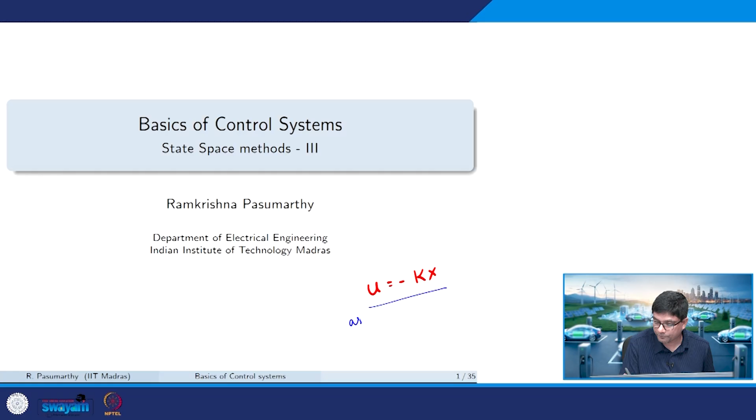We'll continue our discussion on state space methods. Where we had left off was that we could check the conditions for controllability of a system, and once the system is controllable, we defined certain objectives achievable via pole placement. One requirement there was the control law u equals negative kx, which assumes that x is continuously measured.

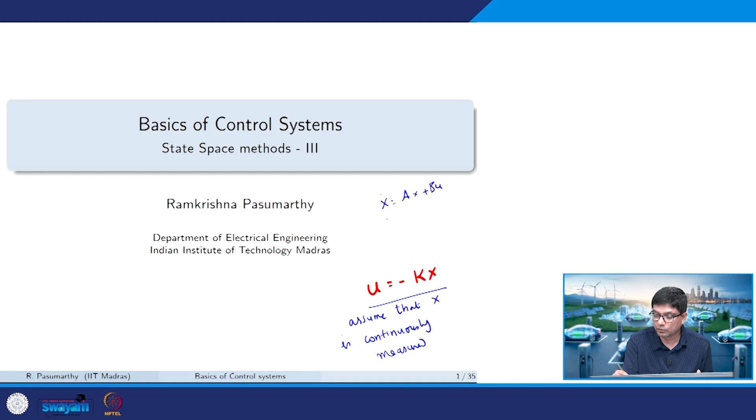Here x are the states. If I look at a DC motor, I assume I'm measuring the position, the angular velocity, and the current. In some cases it may not be possible to measure all the values, so x is not readily available. What happens if my states are 3, but I can only measure 1 at the output? So I'm looking at systems of the form x dot equals ax plus bu, and y equals cx.

In the pole placement approach to control system design, we assume all state variables are available for feedback. In practical systems, you'll only have a few outputs which are measurable. Speed in a DC motor I may be able to measure, but not positions or currents, and some may be physically unmeasurable. So we ask: is it possible to estimate the unmeasured state using the measured output data? This brings in the notion of the observer, which reconstructs unmeasurable states so I can apply state feedback control.

We'll also conclude our series of lectures on control systems by looking at what happens if there is measurement noise, and how we design things like the Kalman filter.

This brings us to the notion of observability, which we'll quickly run through. Mathematically it's the dual of controllability, and answers the question of what if all the states are not measurable. Observability deals with the possibility of estimating or observing the state of the system just from knowledge of its outputs - I don't even necessarily need the inputs.

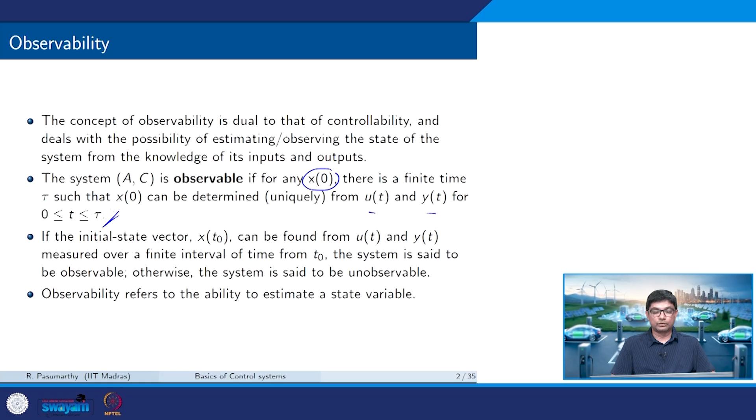The system is observable if for any initial condition x naught, there exists a tau such that x naught can be uniquely determined from u(t) and y(t), largely outputs, observed over a given period of time. So if the initial state vector can be found from u(t) and y(t) measured over a finite interval of time, the system is said to be observable; otherwise it's unobservable. Observability refers to the ability to estimate a state variable.

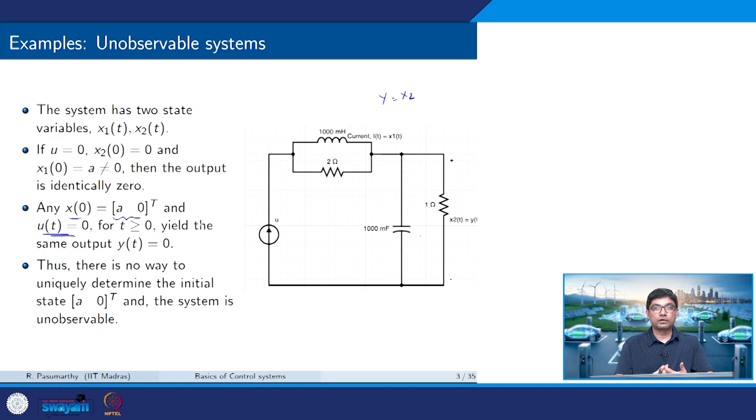Let's see this concept with an example. The circuit here has two states: the inductor current and the capacitor voltage, and let's say there is no input. If u is 0 and x2 is 0, and x1 is some non-zero value, the output is identically 0 - say I'm measuring y as x2. Now any x naught which is (a, 0), with u(t) equal to 0, will yield the same output for any value of a. So there's no way to uniquely determine the initial state a, and the system is rendered unobservable.

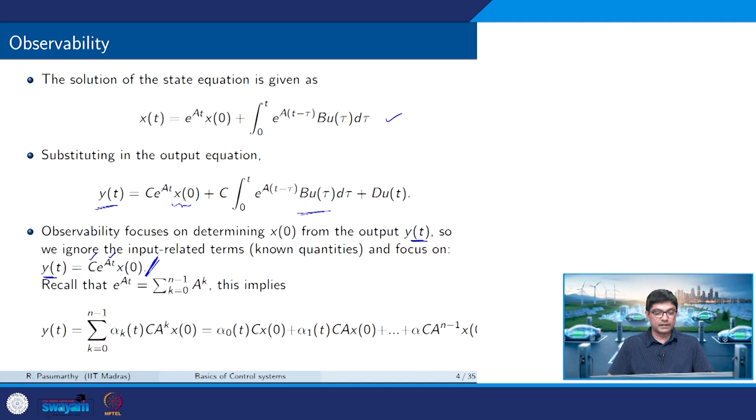So again, I have an equation in the unknown x naught. So I do a little bit of matrix algebra and ask myself a question: when does a solution x naught exist?

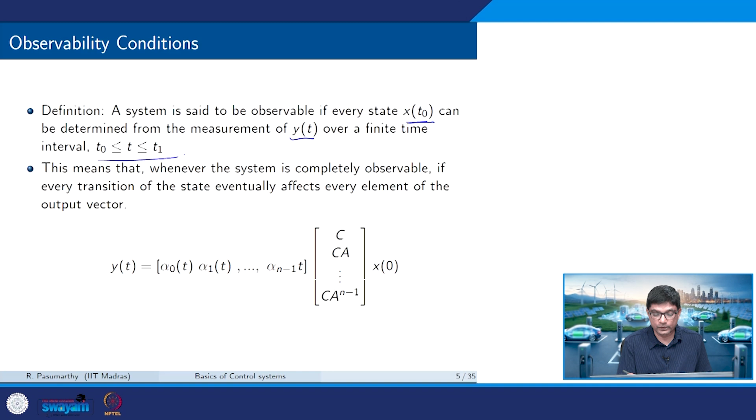A system is said to be observable if every state x at t naught can be determined by the measurement of y over t, over a finite interval from t naught to t1. This means that whenever the system is completely observable, every transition of the state affects every element of the output vector. Mathematically, this means finding x naught boils down to looking at the rank of what I call the observability matrix. We won't go too much into details, but you can write these expressions as a set of linear equations. The condition for observability is that the system is completely observable if and only if the rank of the observability matrix is n.

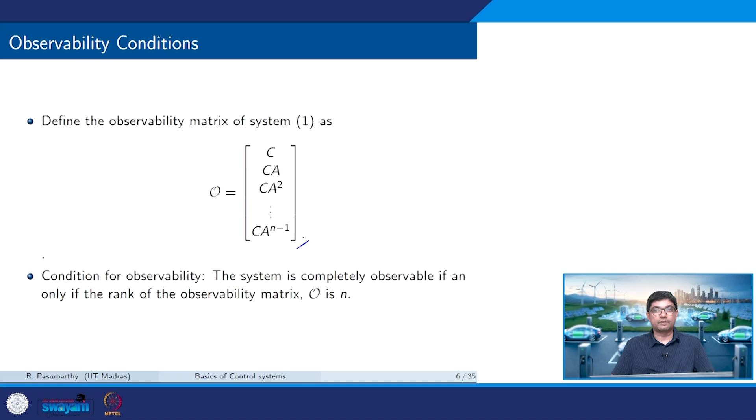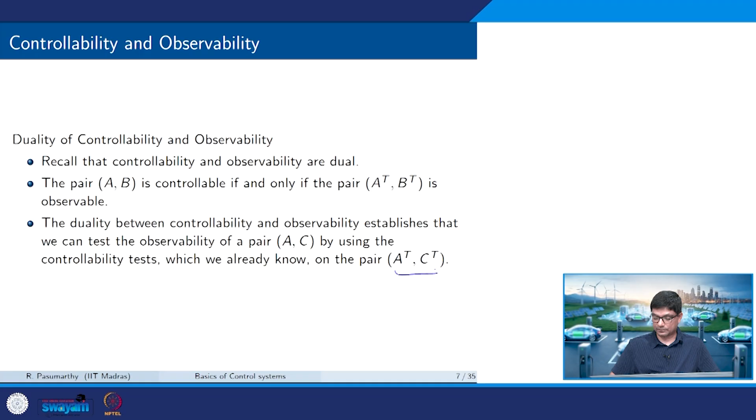There is a duality between controllability and observability: if the pair A, B is controllable, it means the pair A transpose, B transpose is observable. Similarly, observability of a pair A, C can be tested by looking at the controllability test of A transpose, C transpose. This is just a small passing remark.

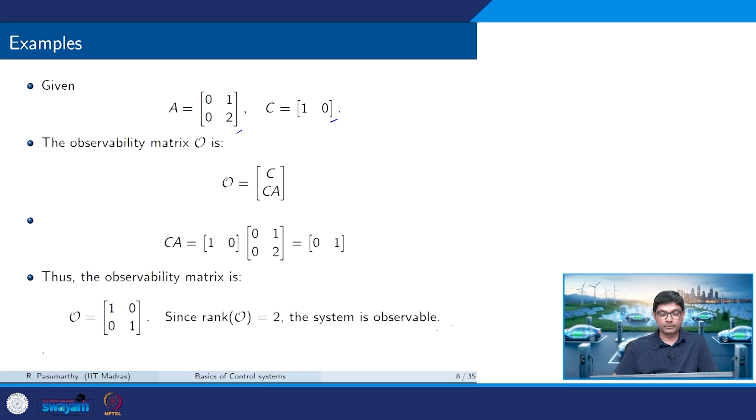So how does this look? I have a system where matrix A is of this form, matrix C is of this form. I quickly compute the rank of the matrix and see that the system is observable, because the rank of the observability matrix is 2.

Now, in the above example, if I convert the state space to a transfer function, I get a system of the form s squared minus 2s. The system has 2 states and I see there are 2 poles of the system here. There is no pole-zero cancellation, indicating the system is therefore completely controllable and also observable, so I do not lose any poles or zeros during the cancellation.

Now, instead of b being 1, 0, let's say the input enters through the x2 term, and c remains 0, 1, b is 0, 1 transpose. The transfer function of the system now will have only one pole, 1 over s minus 2. Note that there is a pole-zero cancellation at s equal to 0, indicating that the system is either unobservable or uncontrollable. The rank of the observability matrix is given by 1, and therefore the system here is unobservable.

So whenever we lose controllability or lose observability, there will be a pole-zero cancellation in the system.

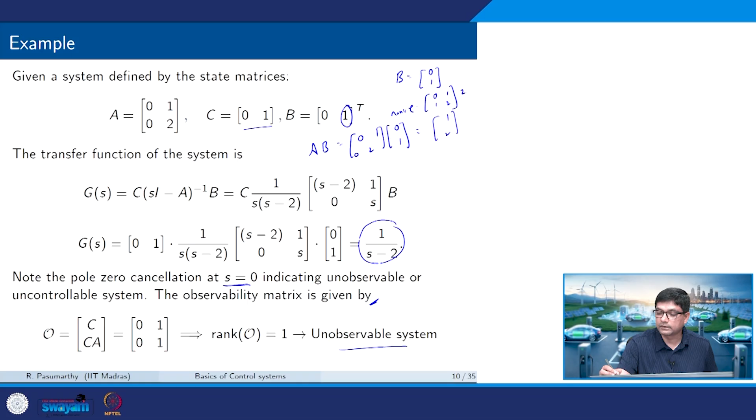So let's quickly check if the system is controllable or not. When b is 0, 1, A times b is 0, 1, 0, 2 — my b is 0, 1, this will be 1 and this will be 2. So we get 0, 1, 1, 2. Well, the system is actually controllable, but the pole-zero cancellation now affects the observability of the system, because the rank of C is 2, and therefore the system is controllable, but it is not observable.

So now, back to why we are designing this: we need to implement u equal to minus kx, and in that implementation, sometimes all the states are not available for measurement. Now, given the notion of observability, we ask: can I get the initial state based on certain measurements of the output from some initial time to some final time?

So why is the notion of observability not completely sufficient? The standard notion of observability provides only the value at a particular instant of time, say t naught. Now, when I say u equal to minus kx, I'm not just satisfied by taking x at t naught — I need continuous estimates of the state. So, just by measuring, say, the speed, can I get an estimate of theta and the current?

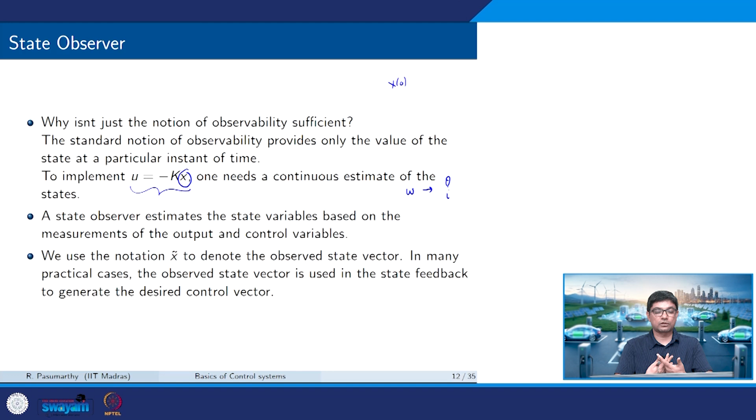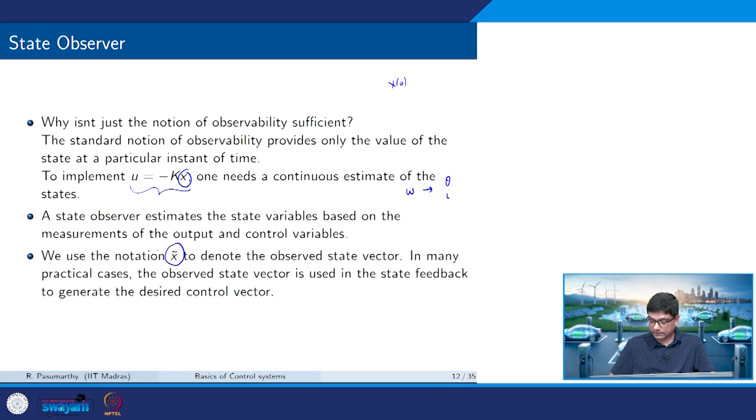This state observer estimates the state variables based on the measurements of the outputs and control variables. We will use the notation x tilde to denote the observed state vector. In many practical cases, the observed state vector is used in the state feedback to design the control vector.

So what does all this mean? This is my given system, and now I consider a copy of the original system. Here x hat is my estimated state, which I use when I can only measure one of the outputs. I can measure maybe the speed of the motor, but I am also trying to estimate the position and the current. So this is the estimated value, and this x is the original value. There will be an error in this definition.

Now taking derivatives of this, I'll skip a bit of this part. So E dot will be A x cap minus A x. It's simple to see that E dot equals A times E, if A is a stability matrix.

What I want is that E must eventually go to 0. So if A is a stability matrix, which means all the poles or eigenvalues of A are in the open left half plane, then the error converges exponentially fast to 0 for every u. I am not really worried about what the input here is.

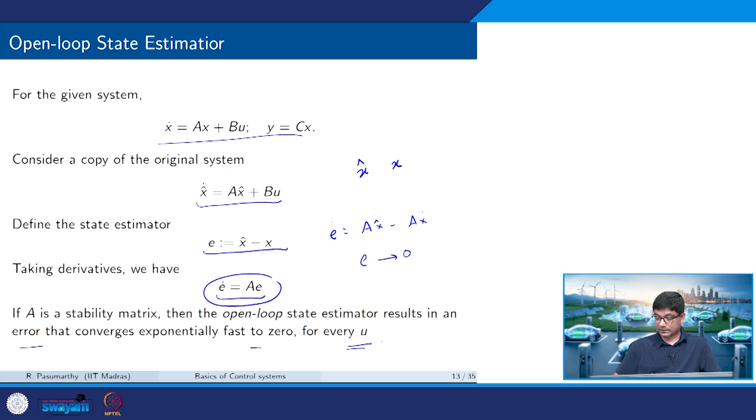Now the problem happens when A is not a stability matrix. When A is not a stability matrix, we need a closed loop estimator, which looks something like this. So I have A x hat plus BU. I introduce this error term in the output, Ke times y minus C x hat, so x hat dot now becomes A minus Ke C times x tilde, plus BU and some Ke y.

Here x hat is the estimated state, C x hat is the estimated output. The inputs to the observer are the output y and the control input u. The matrix here is now called the observer gain matrix, just like u equals minus kx was the controller gain matrix. Ke here will be my observer gain matrix.

The matrix Ke is the observer gain matrix. It is a weighting matrix to the correction term involving the difference between the measured output and the estimated output.

Now I look at what the observer error is. The observer error is again x minus x tilde. So E dot now becomes, with some simple manipulations, A minus Ke times C.

Recall the expression of state feedback. You had A minus bk times x. You could design this k to make A stable if it is not already stable, assuming the system was controllable. And if you also want to place poles at some desired locations, I could design an appropriate k.

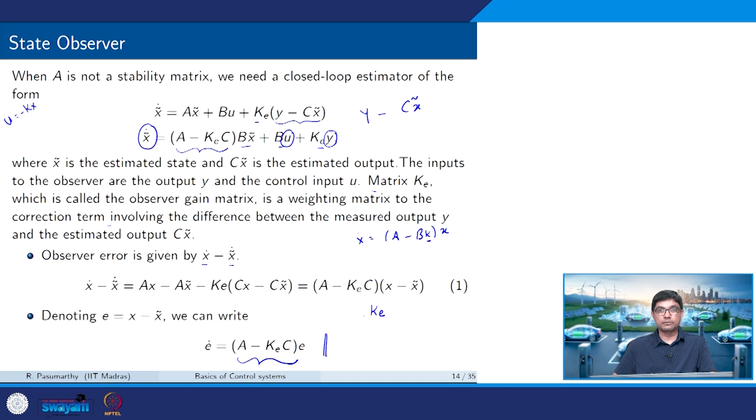So in this case, if A is not stable, I can design an appropriate Ke to make A minus Ke times C stable, and therefore my error converges to 0. If the eigenvalues of A minus Ke C are chosen so that the dynamic behavior of the error is asymptotically stable and adequately fast, then any error vector will tend to 0 with adequate speed. The observer gain Ke can be determined to yield the desired stability matrix.

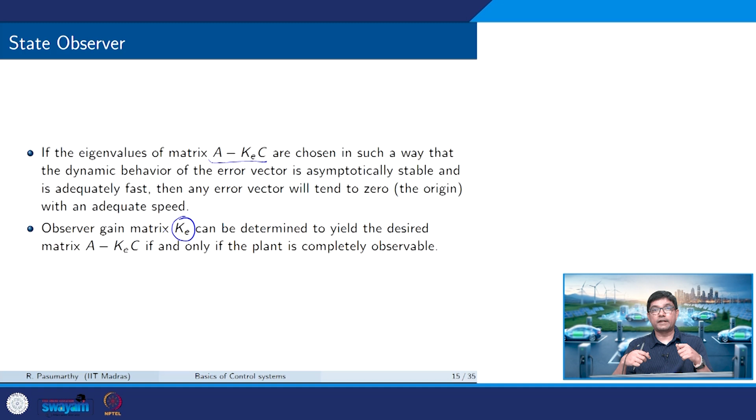Of course, when can I do this? When could I do A minus bk? I could do this if and only if the system was completely controllable.

In the same way, I can now do A minus Ke times C if and only if the system is completely observable.

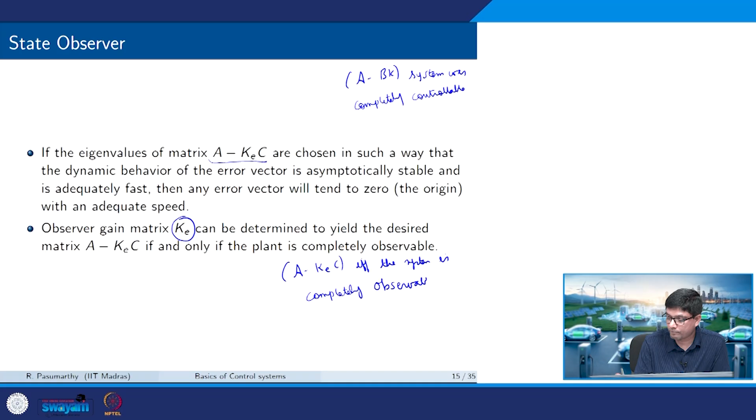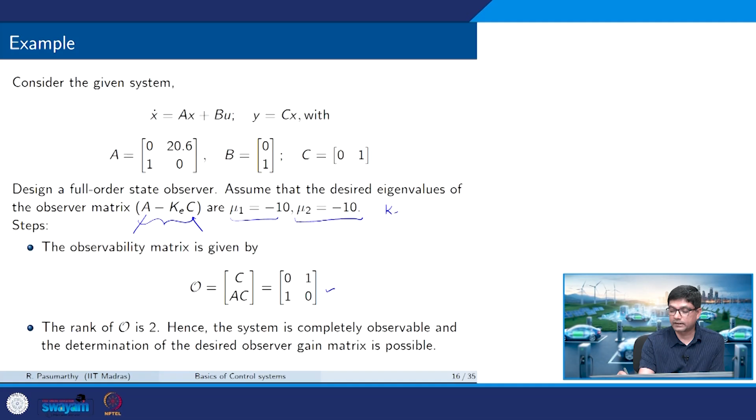Those details we can kind of skip for now, but we'll assume that the system is observable for our design purposes. So if I am given a system of this form, I can first check that the system is fully observable, and if I assume that, A minus KeC will have some eigenvalues. A is given to me, C is given to me. If I choose the observer poles to be at -10, I can design an appropriate K which will place the poles accordingly.

Okay, so it's just a standard process. In the same way as I design my A minus BK, I just look at the desired characteristic equation and map it to the characteristic equation with the unknowns KE1 and KE2. I equate the coefficients, compare the coefficients, and design an appropriate KE matrix. This is very similar to what we did earlier in pole placement.

Now what is the effect of adding an observer? In the pole placement design, I assumed that x(t) was available for feedback. However, in practice this may not be the case. I may not measure all the states, but I can measure some outputs as y equal to Cx. So we will need an observer, and we will use the observed state for the feedback.

So instead of u equal to minus Kx, now I am using u equal to minus K x-tilde. These are the observed states, and eventually the observed states will match the original states based on the observer design.

So the design process becomes a two-stage process. First, I determine the state feedback matrix gain K, assuming that the states are available for measurement. I complete my pole placement design, and then I ask myself, is X measurable all the time? If X is not available for measurement, I check for observability and design an observer.

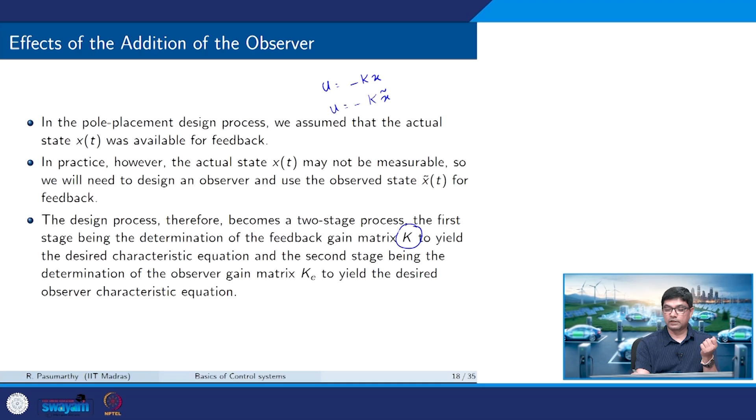So in the two-stage process, I first design the feedback gain matrix to yield the desired characteristic equation. This is based on the closed loop performance, which maps to the location of the closed loop poles. Second is the observer gain matrix, to yield the desired observer characteristic equation.

Now how does my entire process look like? I looked at control design first, then now I'm looking at observer design. So the control design, instead of u equal to minus Kx, becomes u equal to minus K x-tilde. What is my closed loop? This is Ax minus BK x-tilde.

So I can do some manipulations to write this in the form x-dot equal to (A minus BK) times x plus BK times E. How do the dynamics of E vary? E is simple - it's just capturing the error dynamics between the actual state and the estimated state.

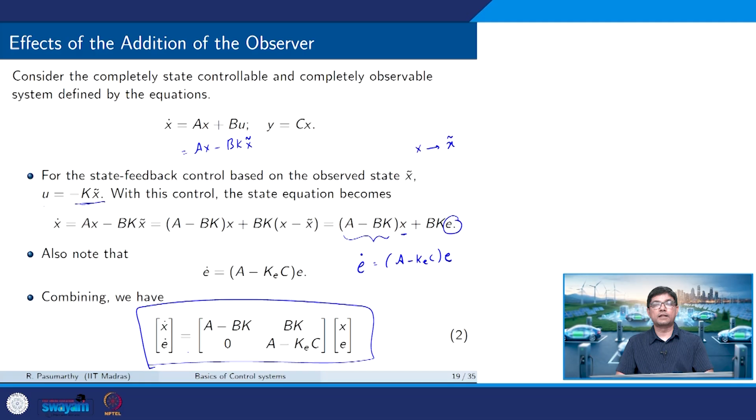So now I have a closed loop dynamics which includes the controller, the state feedback controller, and also has the observer embedded into the design.

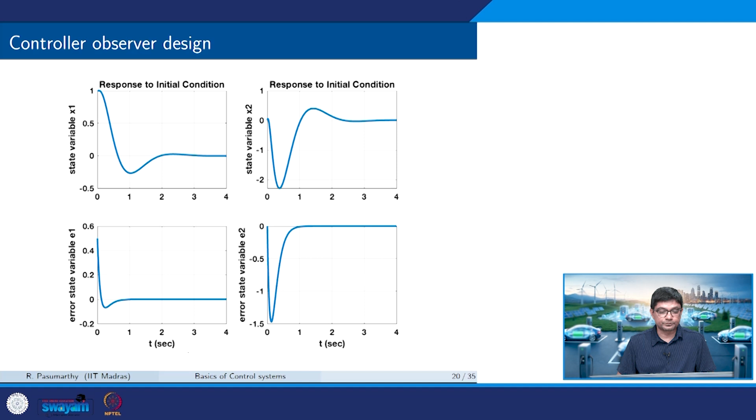So this is just a little plot of the system that we just designed. See how the errors converge to zero.

What happens when I add the observer to the system? Assume that the plant is completely observable, and we use observer-based state feedback control. Then the equations for the observer are given by something like this: x-tilde is a function of x-tilde itself, some y here, and u equal to minus K x-tilde.

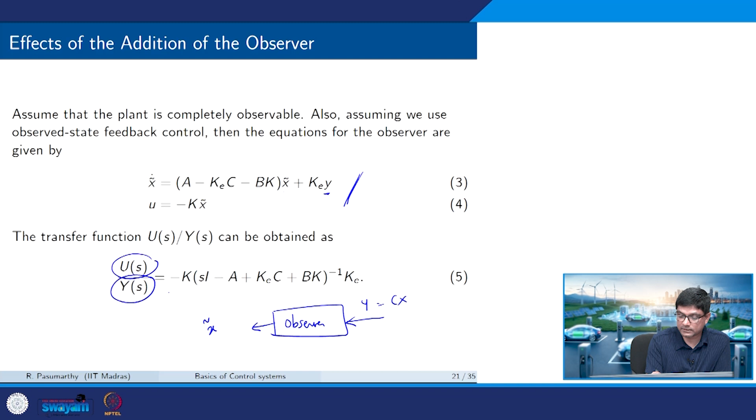So the transfer function of the observer - if I look at the observer, what does it do? The observer takes in the states y, measured as C times x, and gives as output my x-tilde. So if I look at the transfer function from y(s) to u(s), that becomes an expression like this.

So the effect of adding an observer is: I have the plant which gives me y(s), I take these measurements y(s), feed it through an observer, and generate the appropriate control input u(s) to the plant. So this transfer function now acts as a controller for the system, and hence we call this the observer-based control transfer function, or simply the observer controller transfer function. So this has both things in it - it's not just u equal to minus Kx, it has the control part, and it also has the observer part embedded into it.

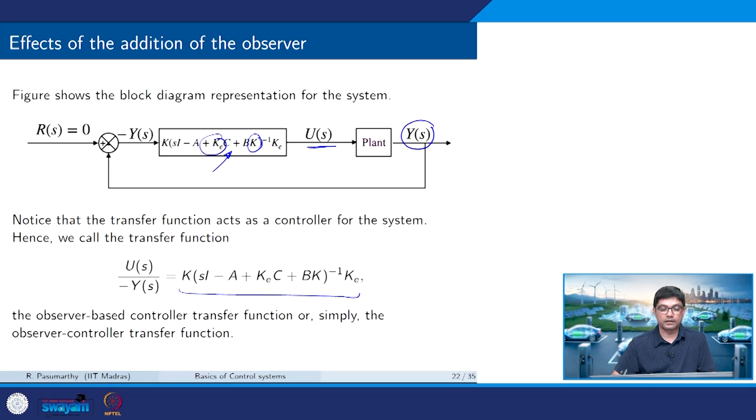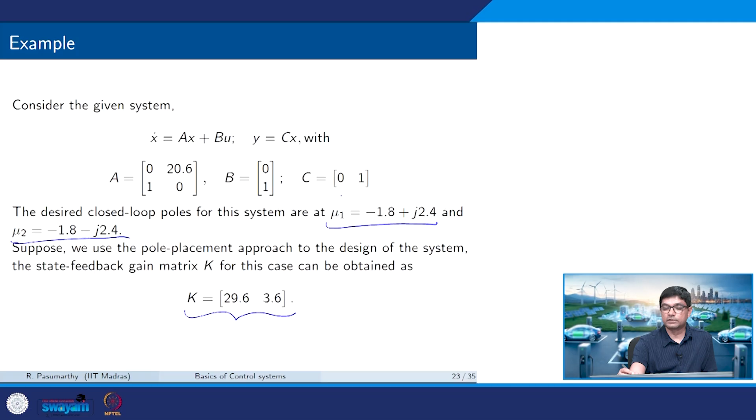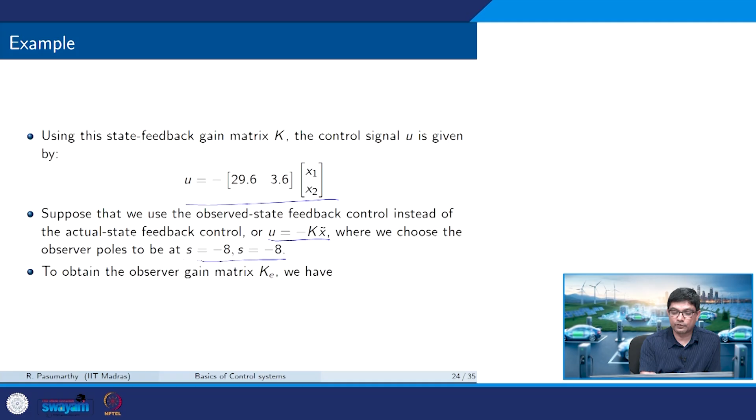Now suppose we use observer-based state feedback control instead of actual state feedback control. My output is only x2 - I don't measure both state variables x1 and x2, instead my y only gives me x2. So instead of using actual state feedback control, I use u equal to minus K x tilde, and I want to place the observer poles. I choose them a little farther away from the controller poles.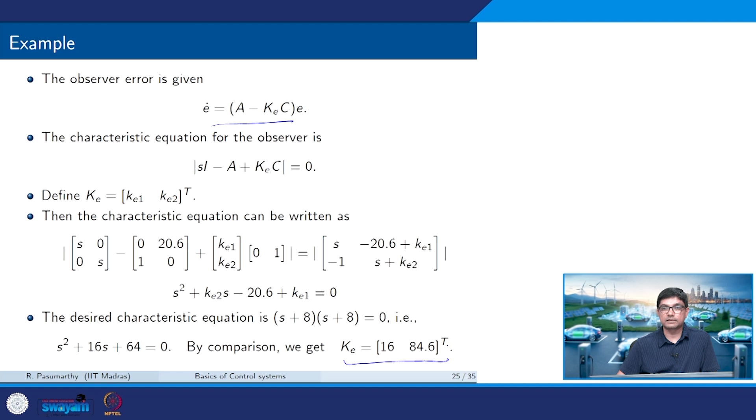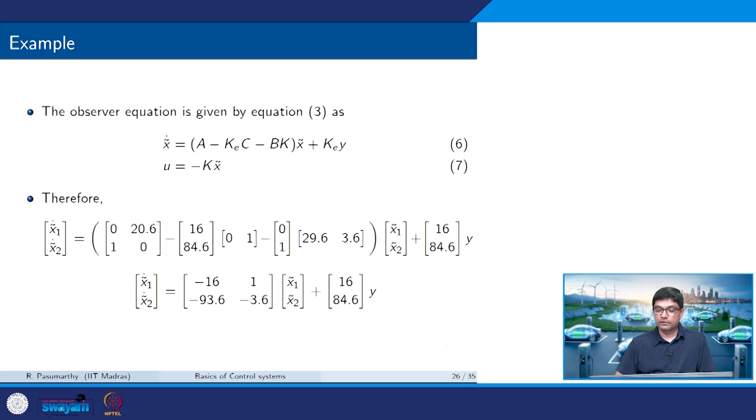So the desired observer gain matrix will be computed by the error dynamics, and I just do the same things as for pole placement. What I get is Ke equal to 16 and 84.6. The observer-based equation now takes this nice looking form, where I have both the controller and observer design. So the dynamics can be described individually for the plant, which has states x1 and x2, and then I have my observed states, which are x1 tilde and x2 tilde.

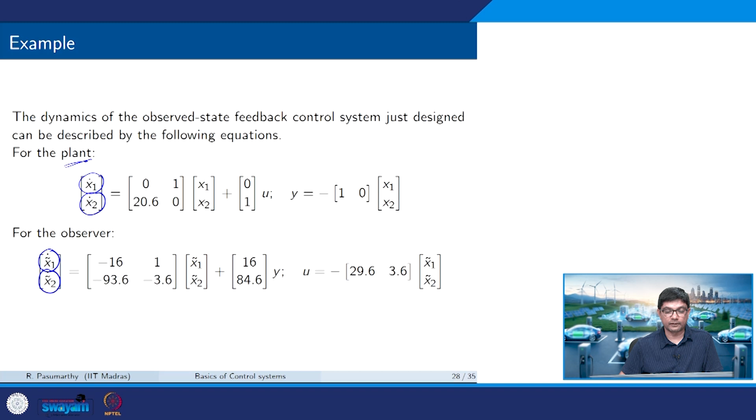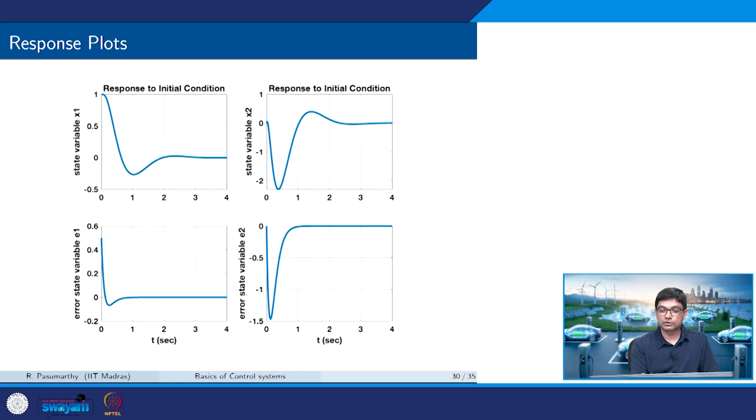So the response of the system to the following initial condition - I can just plug in the equations and see how my system responds to given initial conditions. You see my error goes to zero, and the states take values as desired.

In this example, I choose the controller poles at minus 1.8 with some negative real part, and -8 and -8 for the observer poles, which results in some appropriate control gains. So what I see here is that minus 1.8 plus 2 is something, whereas -8 is far away. So we note that the observer poles are placed far to the left of the controller poles.

Now you might ask, why am I placing it so far? What I want ideally is u equal to minus K x tilde, where I have the estimated states, but I want my observer to quickly estimate the states and then feed them to the controller. For that reason I place my observer poles very far away, so that the dynamics are faster and I get the estimates faster.

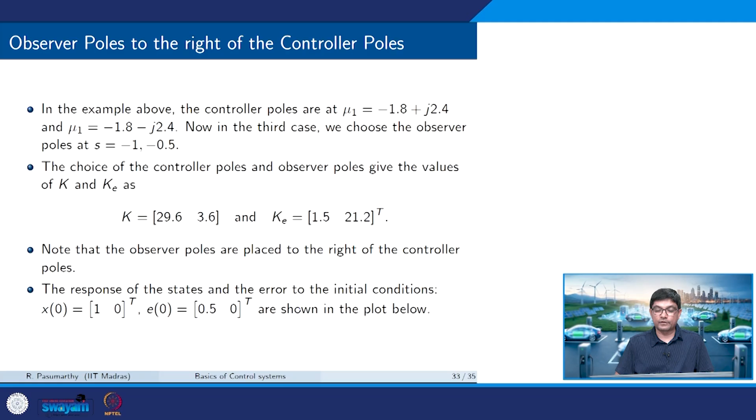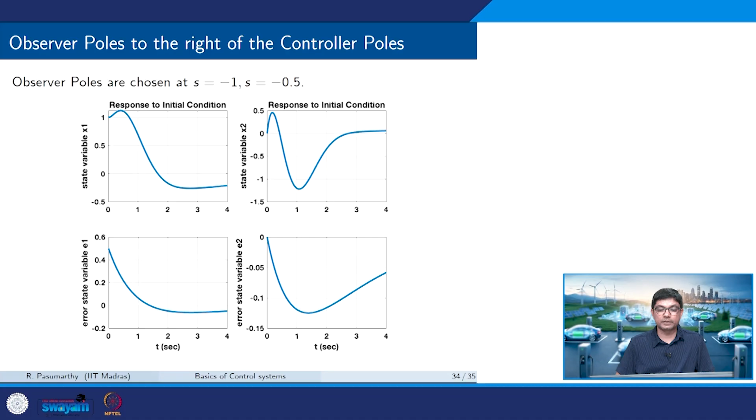So we do a little more adventure, and say, okay, I will even place my observer poles to the right of the controller poles, and you see that the response is totally undesirable - it becomes very slow. So in summary, if the observer poles are placed to the right of the controller poles, the observer poles are slower than the controller.

Then the estimation error takes long to decay. If the poles are placed close to each other, the observer tracks the system state but not significantly faster than the system itself, again leading to delayed correction of errors. Therefore, I want to place my observer poles far away to the left of the controller with much faster dynamics, in which case the observer quickly corrects the estimation error, and the state estimation decays much faster. Then I get the exact states for my feedback, which gives the appropriate desired closed loop response.